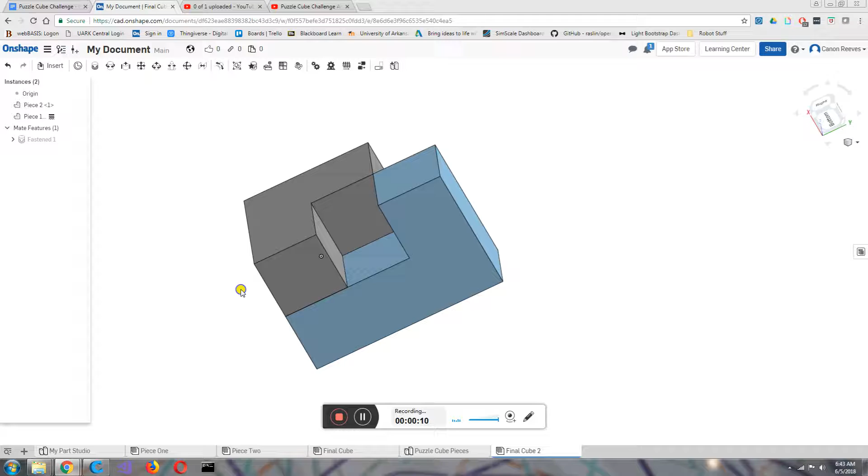Alright, in this video I'm going to walk you through making my own puzzle cube using the second approach. I'll talk through some of it as I do it. I might move a little fast, so feel free to pause and rewind.

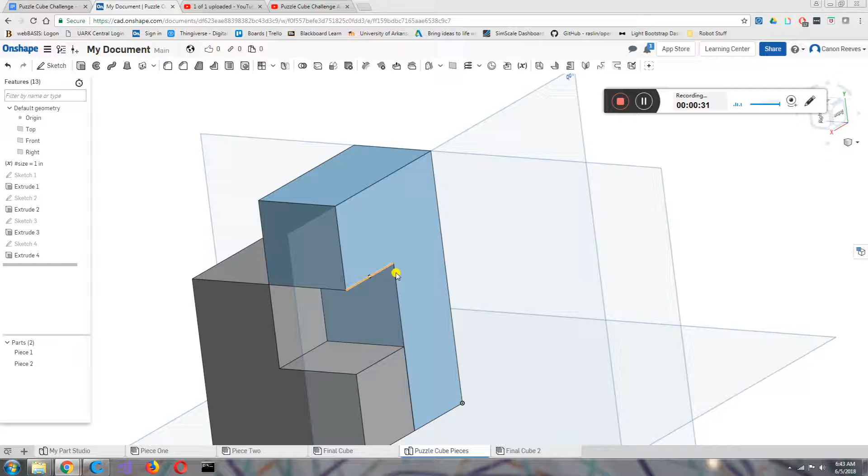To start, I'm going back to my puzzle cube pieces part studio, and I'm going to create more parts. I like to assemble it here inside the part studio as I create it, so I can see where I have room. So far I've just made a 2x2 cube, so I've got a lot of room in some directions. I'm going to start right here.

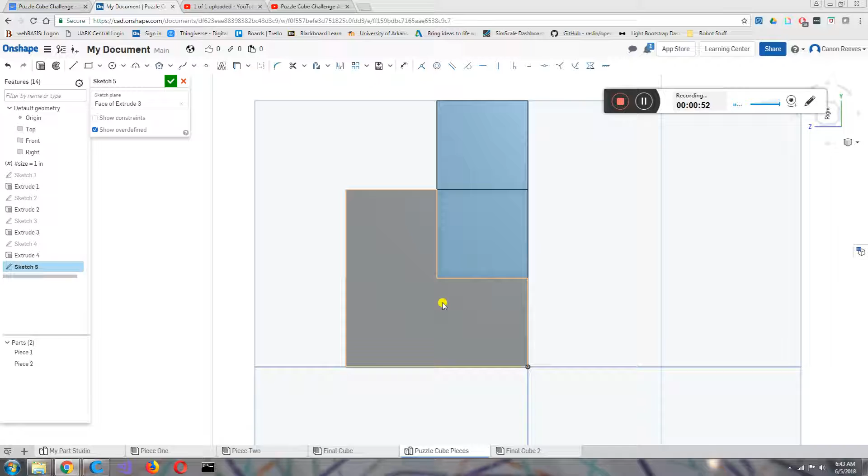It's still blue, so I need to fix that. I'm going to click on dimension, click on this side, and type hashtag size. This one's still pretty long, and I want it to be 3 long.

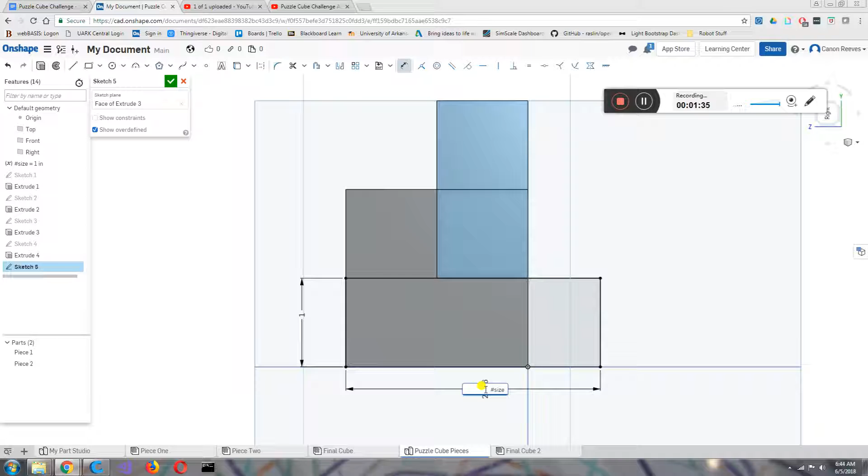I'm going to click on dimension again, then click on this line, and say hashtag size times 3. Now it's 3 long. I think I want it to be a little cooler than that. Actually, no, we'll go with this.

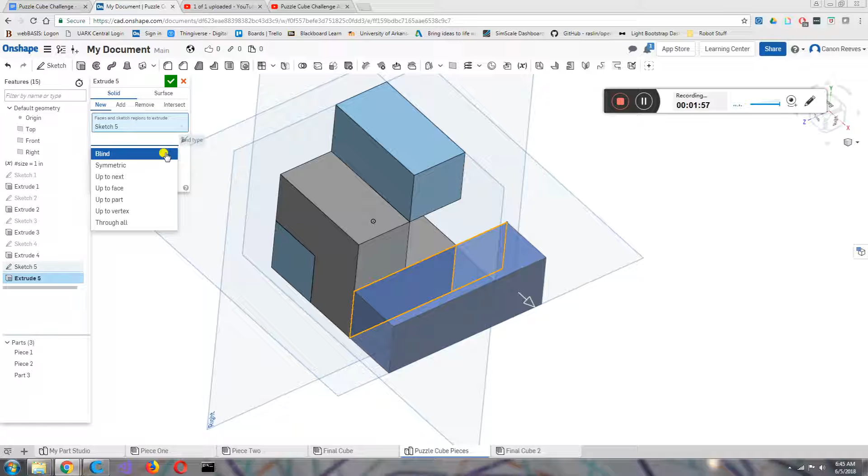I'm going to hit the check mark, go to extrude, hit sketch 5, and say I want it to be a new one. So here we have a new part. I'm going to change this depth to hashtag size, then hit the green arrow. So there's another part, but it's only 3, and I can do something a little fancier.

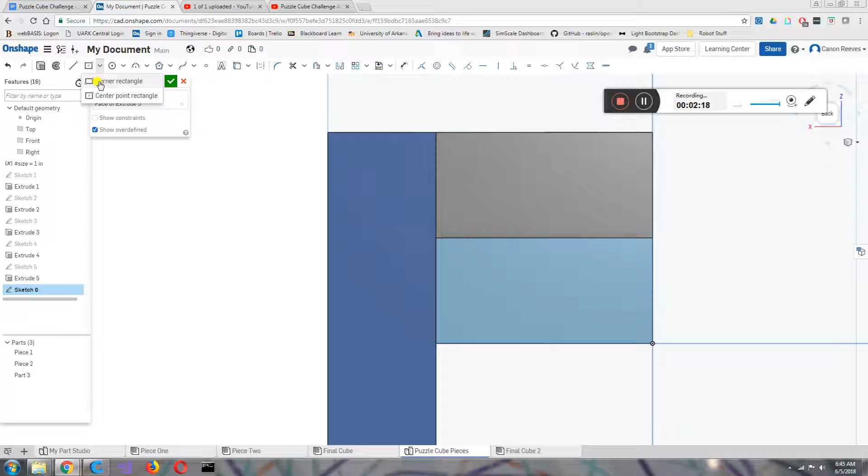So what I'm going to do is create a sketch, go to this top right here, and make a rectangle somewhere. Oh, wrong one - come over here, hit corner rectangle right here and right here.

So what if I want this to be in the middle, like in this middle cube spot, so I can make a cube go up right here and then over into this gap right here? Well, if I just did this line and said hashtag size, it would get the right size, but this whole cube still moves.

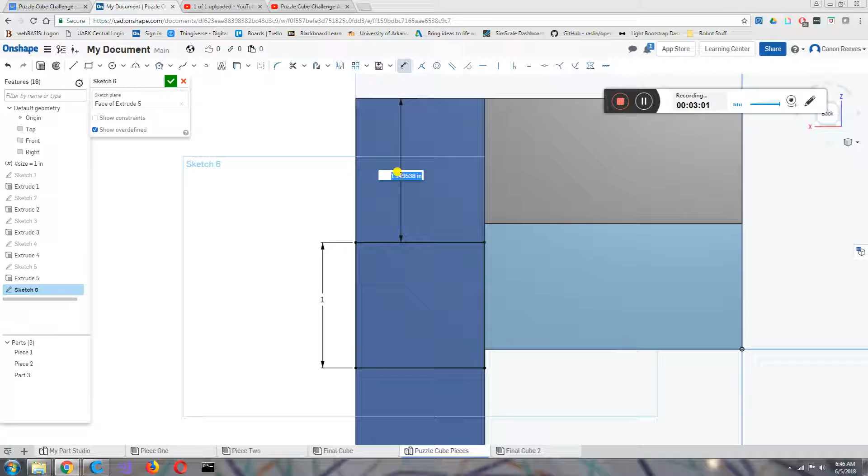So I want it to be in line with this. What I can do is go back to dimension, click on this line and this far line right here, and also want this to be size. So I go hashtag size, and that puts it right there in the middle, if you can see that - that's in the middle where I want it.

I'm going to hit the check mark, go to extrude, and click on sketch 6, and we see our cube. I'm going to type in hashtag size, and we're good to go.

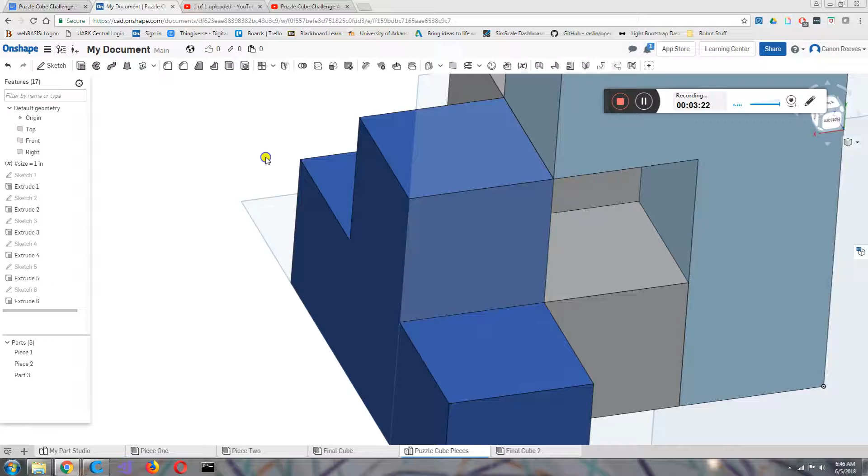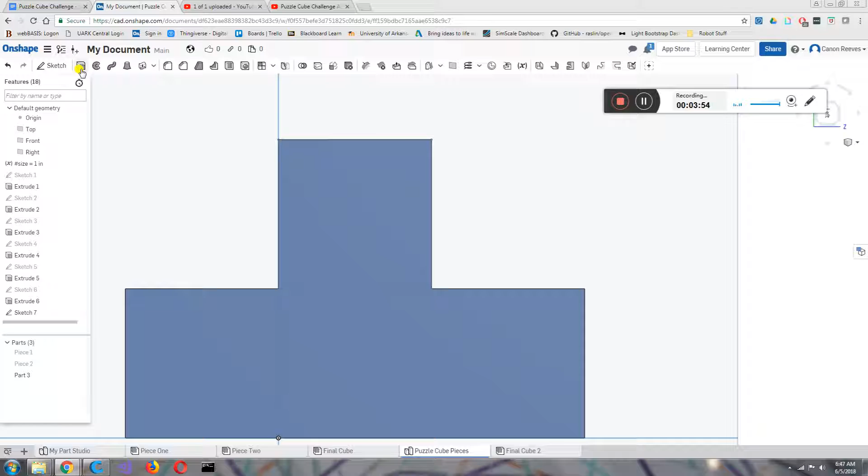So I want a rectangle from this corner, a square, from that corner to that corner. If we look, it's all black because it's just using the corners, so we're good to go. I'm going to hit the check mark, hit extrude, rotate it a little bit, and pick the last sketch. Go to this, type in hashtag size, and we're good to go.

There's another piece. So now I want to see my other pieces. First I'm going to rename this - right click on it, go piece 3 - and I'm going to click on the eyeball.

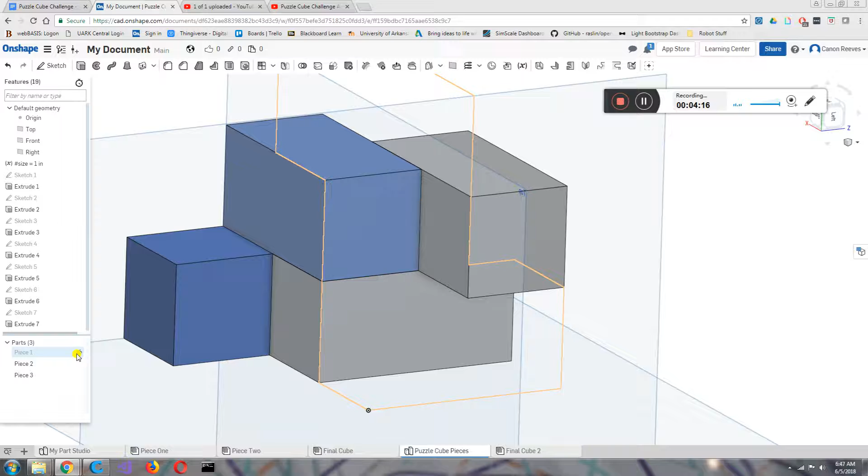So you see how there's a little cross through it? That just means it's invisible right now. Alright, so now they're all visible, and let me check my assembly. Actually, I can keep working on it in here, and I'll check the assembly in a minute.

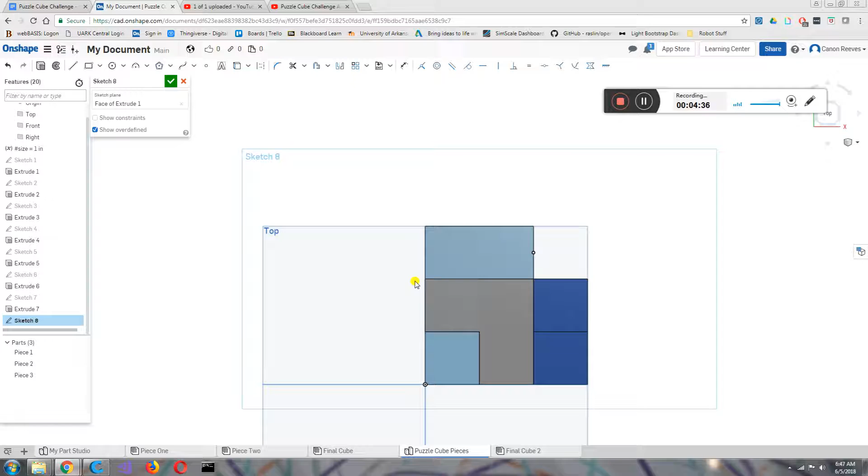So I see an opportunity for a kind of weird piece. What I'll do is click sketch, click on this face right here. Okay, so I'm going to make an L that goes all the way along to this.

Let's see, what would be the best way? Why don't we start by making a line? Go from this corner all the way out here, and then we're going to come down, and it's going to go right here, and it's going to go over all the way up to right here.

Not everything is straight yet, but I can fix that. Come up, click on that. So some of the stuff isn't exactly right, and we want to change that.

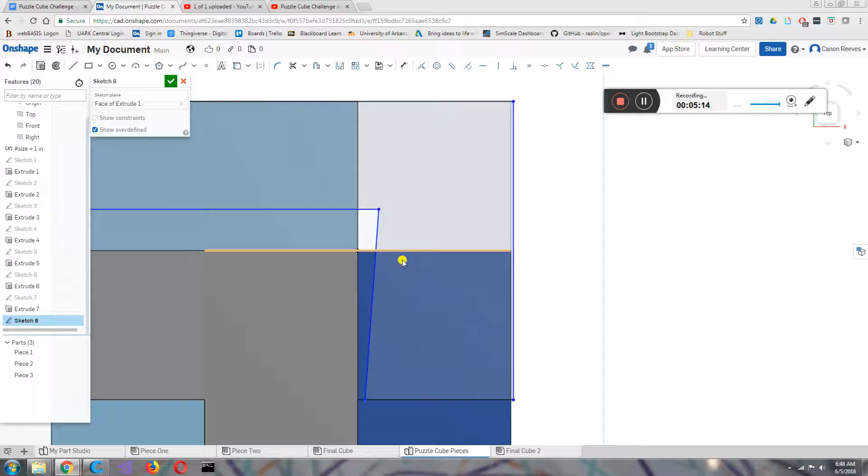So I want this corner to be touching this corner, and I want this corner to be touching this corner. You can just drag these things.

What you can also do is click on it, click on that point, and go over here and click on what's called coincident. And coincident just means that they're touching each other. So now it's black and they're on the same spot.

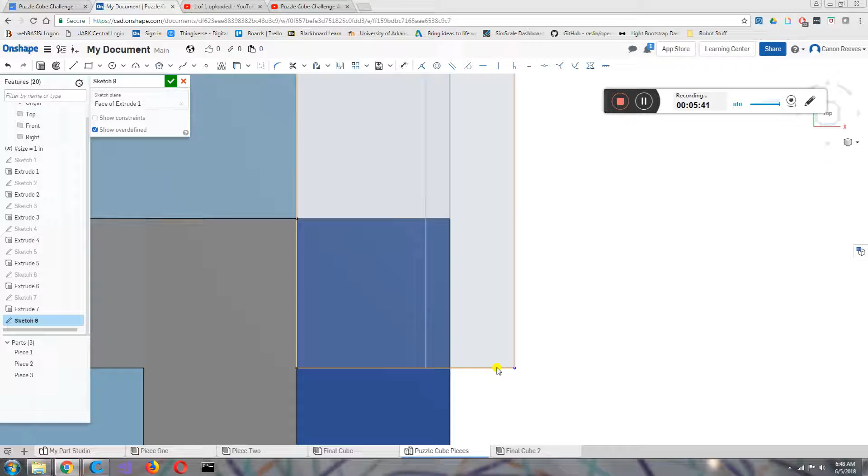We've got the same issue over here. So what I can do is click on this point and this line, and I can say they are coincident. So now the whole thing is all black.

Good to go. Hit the check mark, go to extrude. Asking me where do I want to extrude, I'm going to say sketch 8. So pull out sketch 8, and it's saying new again, and it's a slightly different color.

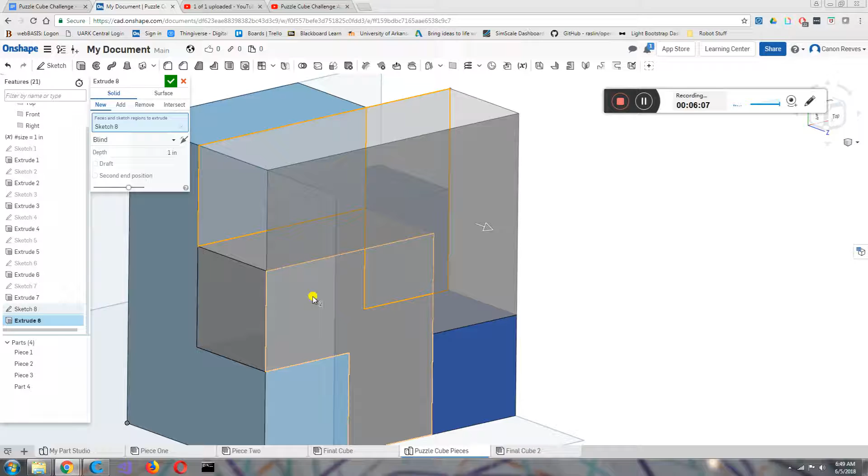For me, it's kind of confusing. They look kind of similar. I'm a little bit colorblind. But I know that they are different because it's saying new. So I'm going to type hashtag size, if I could spell. Hashtag size right there. And we're good to go.

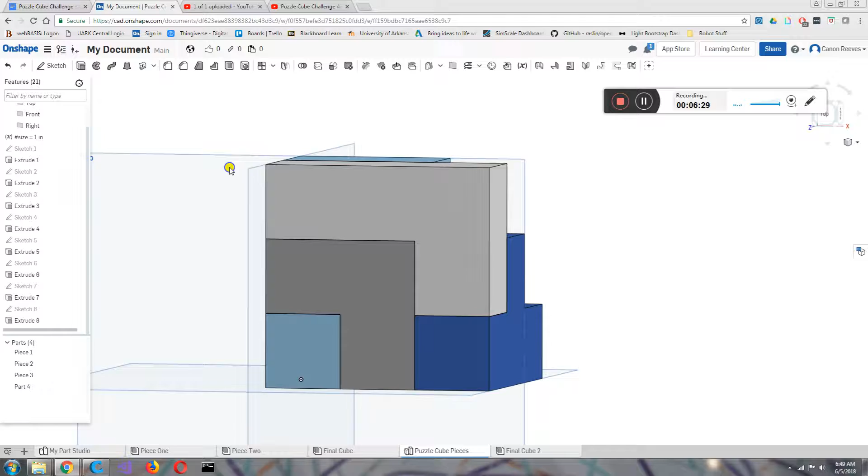So if you look at our cube, we've got 1, 2, 3, 1, 2, 3. But we're missing some stuff over here. So what if this piece had an extra little part to it?

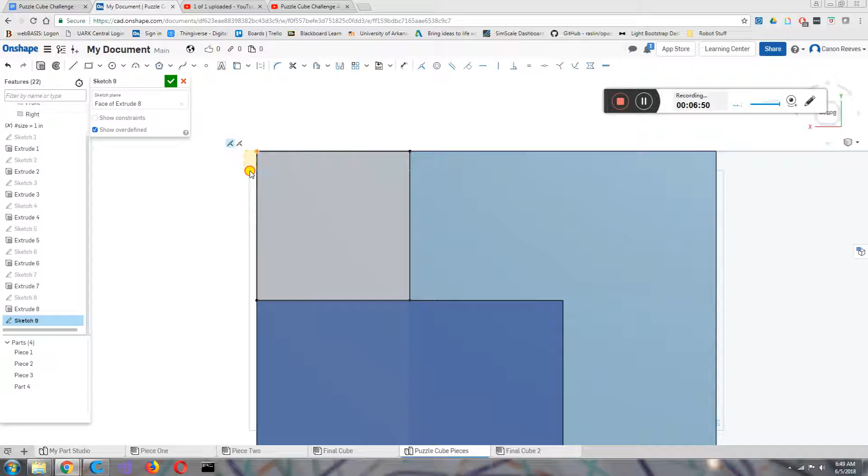So now it's saying new. Remember that problem we talked about in the last video about how it doesn't know if it should be a part of this one or this one? Well, I want it to be adding.

So I click add, now it's red. And I'm going to go click on merge scope right here, left click. And I'm going to click on the part I want, which is this white one. So it becomes a part of it.

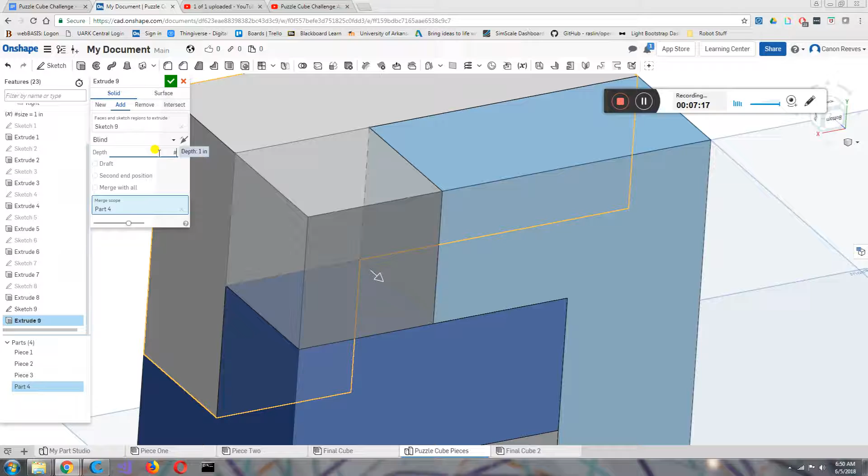I'm going to change depth, the hashtag size, and click check mark. So now we're good to go.

How many pieces do we have? So we've got 1, 2, 3, 4. I'm going to rename that to piece 4.

So it looks like we have room for one more piece. Maybe it's going to be a kind of boring piece. We can change how it looks though. So we'll have to put a sketch on this side.

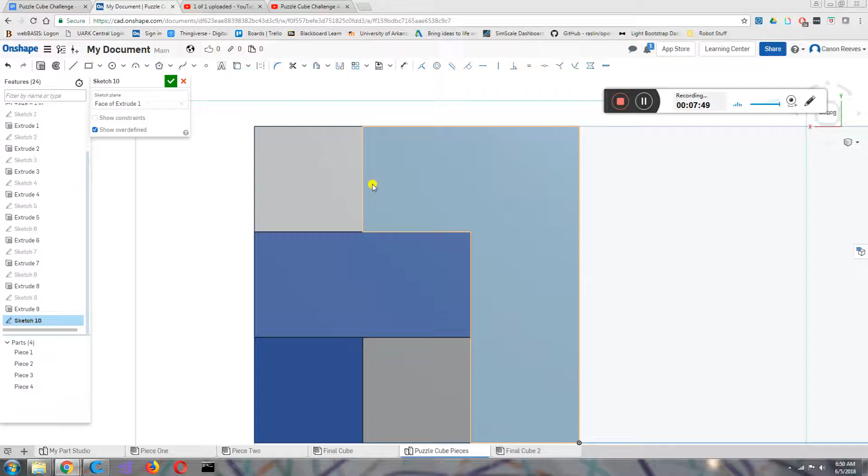And what I think I'm going to do is make it a little bit different. I'm going to make it, let's see. Let's start right here, go all the way up to right here, come over here, and we'll go this way, come down here, and connect back there.

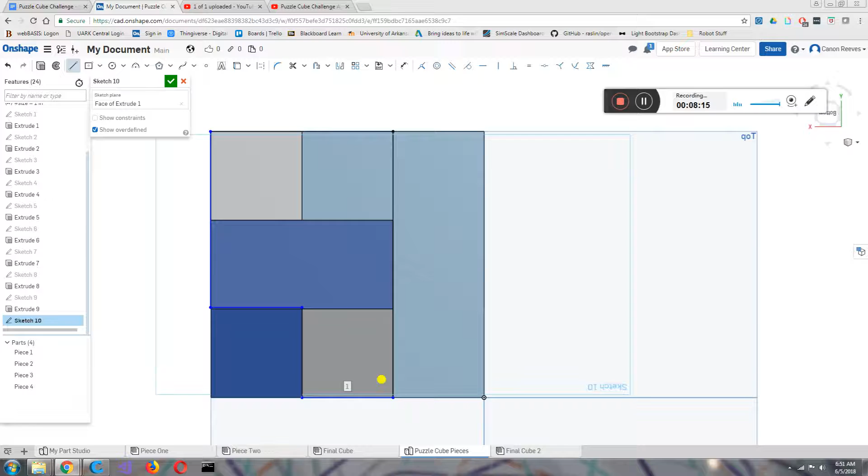So I don't know if you can see all the things that I did there. I'm going to hide all of the other pieces so you get a better idea. That's the shape I just made, and then you see this other bit highlighted. That's just from the face that we're drawing on.

So I want these to be the right size. I want this one to be two wide, so I'm going to go hit dimension, click on it. I'm going to type in hashtag size. Oh, see, that wasn't right because I wanted it to be long. So I'm going to do hashtag size times 2.

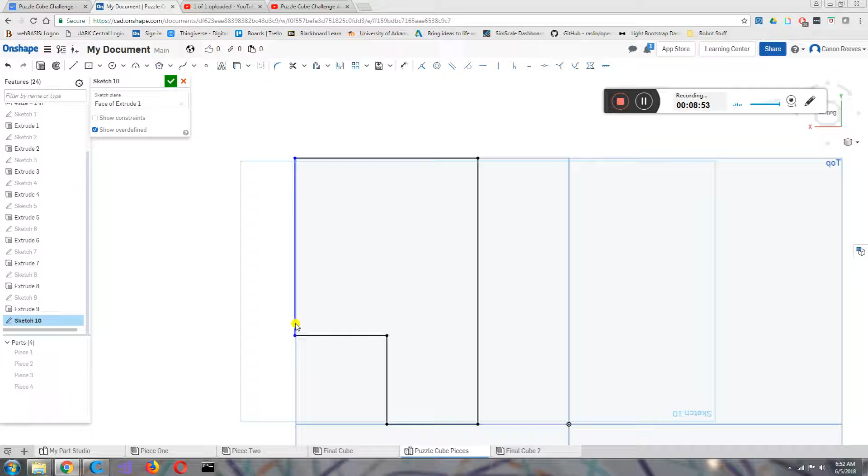Now it's too long, 2 units long, and this side can move, and I only want it to be 1. So I'm going to type in hashtag size. Now the whole thing is black, properly constrained, and I can hit this check mark. I'm going to hit extrude, click on sketch 10, new, go to depth, write hashtag size, and hit the check mark.

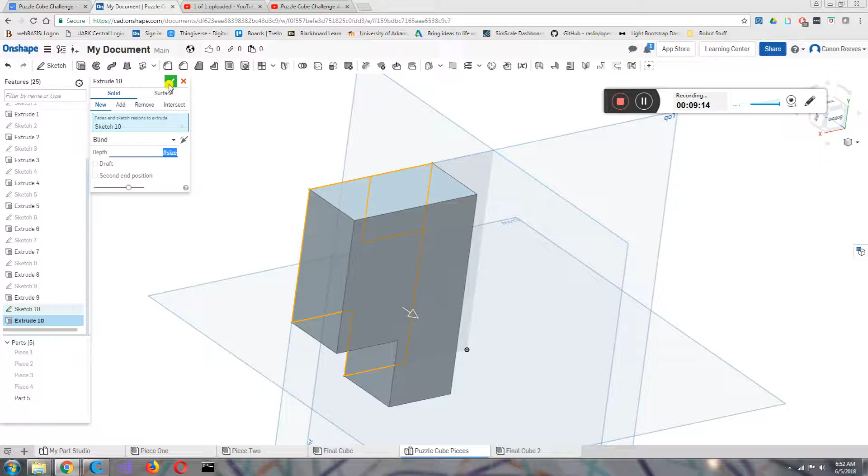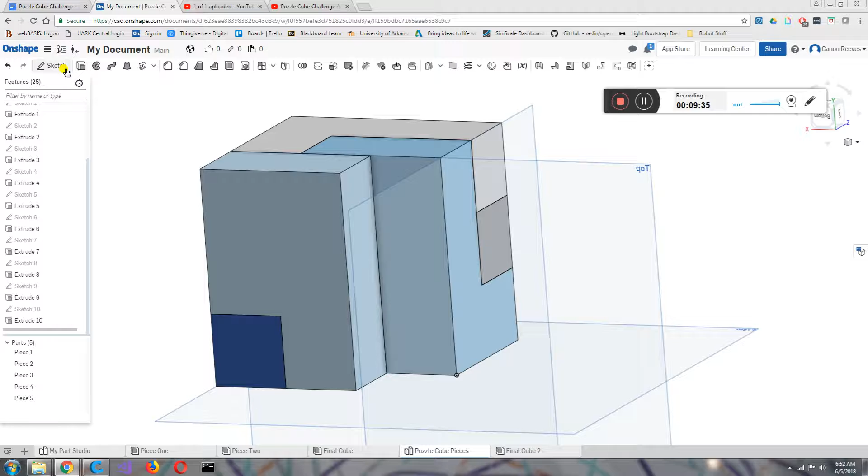So now, if I unhide all my pieces, rename this piece 5. It looks like we've got room right here to add some things, and you can pick how you want to do it. So maybe I want to add 1 to this guy.

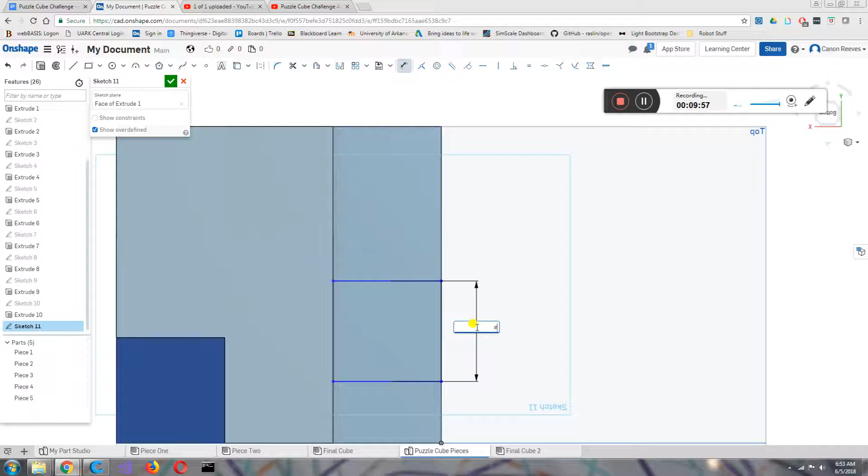I'm going to come over here and hit corner rectangle right there and right there. So it's all up in the air again. I'm going to click on dimension, go to this piece and this line, and make the distance between those hashtag size.

And now we're at the problem again where this is just free forming, and I think I'm going to make it right in the middle. So I'm going to go back, hit dimension, click on this line, and make that hashtag size as well. Now we have one rectangle right in the middle.

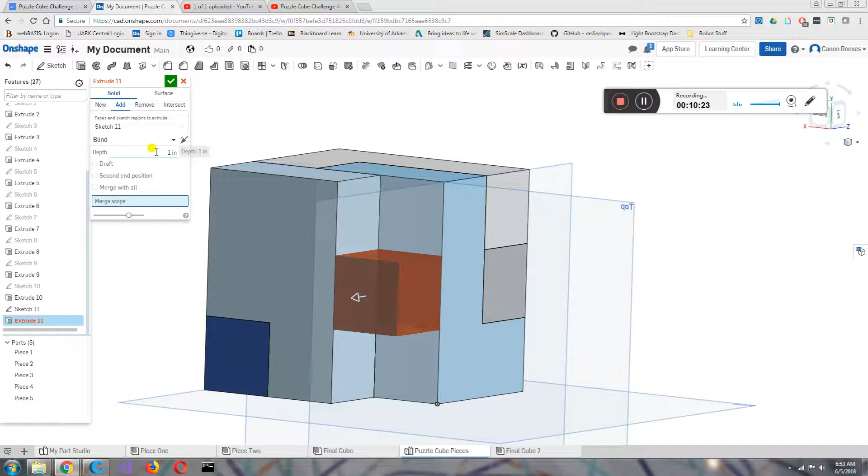I'm going to hit extrude, click on sketch 11, and I want it to add, I think to the blue one right here. Then I'm going to make its depth hashtag size. So there's only 2 more holes to be filled on our cube, and I'll fill it with this one.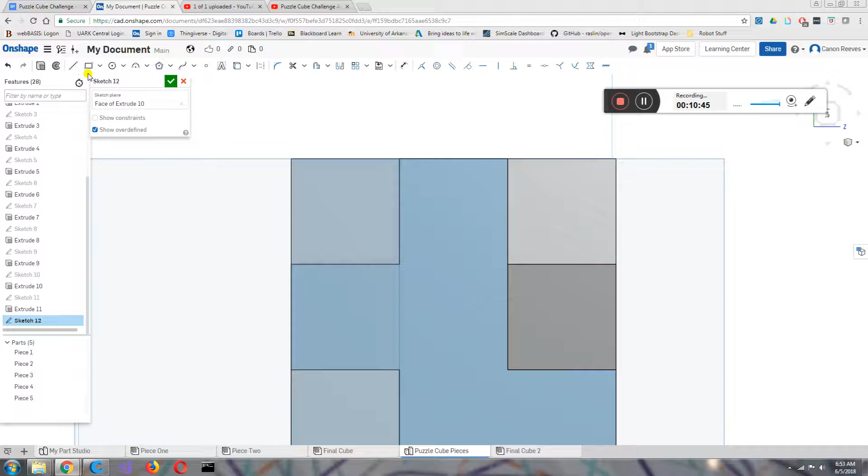So I'm going to come right here and put a sketch on this face, hit N, which stands for normal, and click on rectangle.

Looks like it's still a little bit blue, so you can change that to hashtag size. Now I'm going to show you kind of a cool trick that I really like and use a lot when modeling. If you notice, I can see this little point right here — that's the midpoint between this point and this point, that entire line.

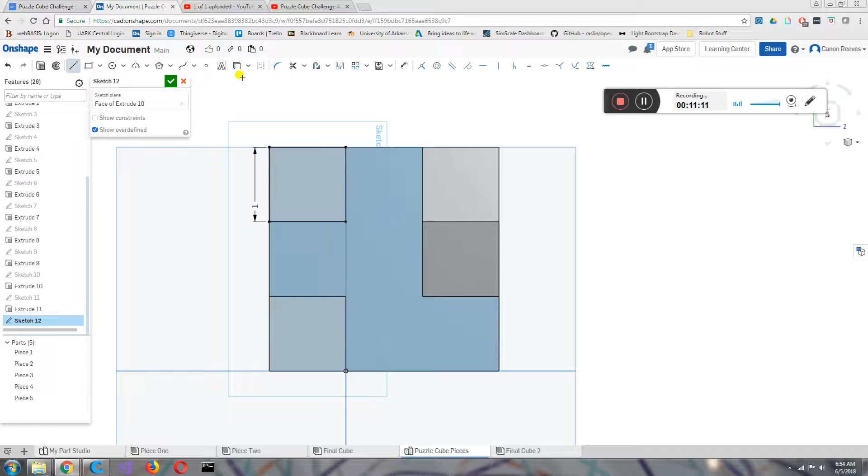What I'm going to do is click on line, and then click on construction, which makes the computer ignore it whenever it's extruding. I'm just going to drag this all the way across. So this line is like the middle of this cube, if I cut it in half.

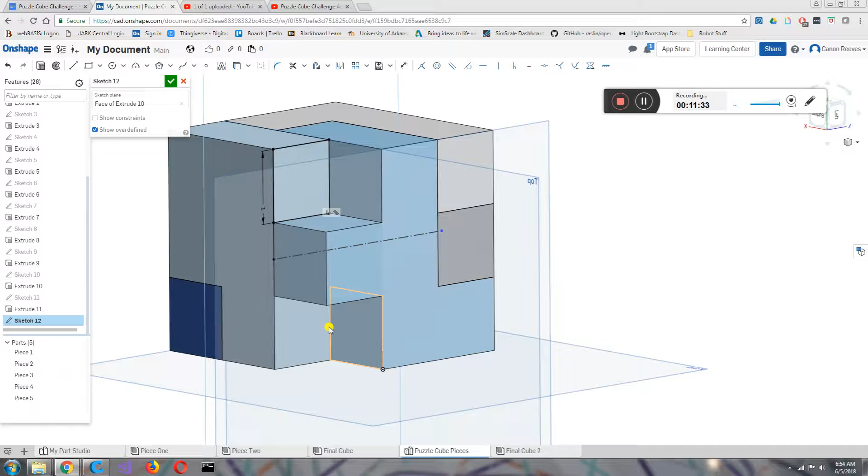And I want another square just like this right here. So wouldn't it be cool if I had a way to just flip it and mirror it? Well, there actually is a way to do that — you just click on this mirror button right here.

We click on our line, and then we highlight everything we want to be mirrored, so it'll be that right there. I don't know if you saw that, but now I have a square right there.

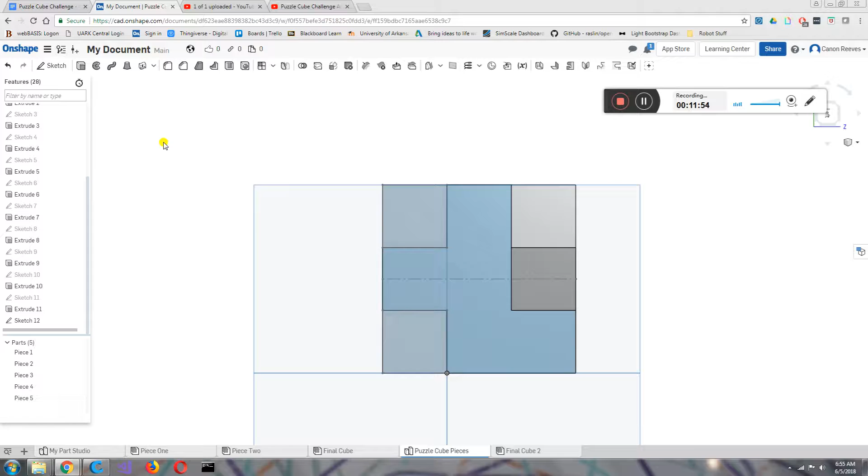So if I go and hit check mark, then go hit extrude, click on sketch 12, it'll extrude, but it looks like it's trying to make new ones. So I'm going to go to add, and tell it that I want it to merge with that piece, and go hashtag size.

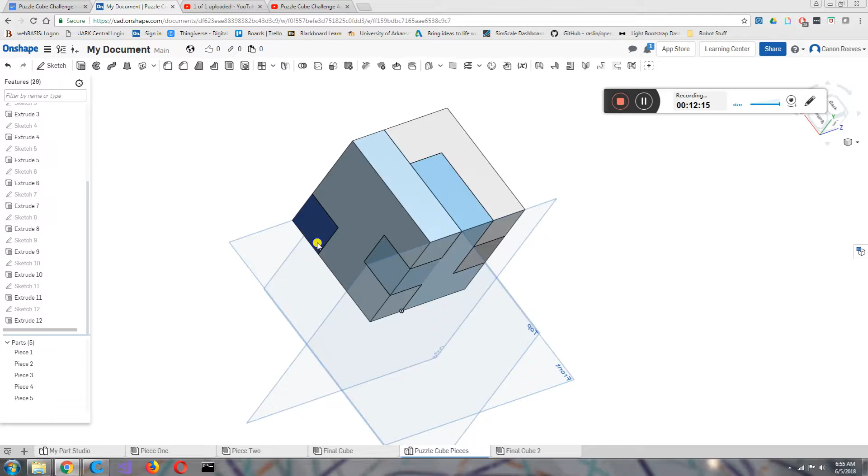So if you look at it, we've got a pretty well finalized puzzle cube. I didn't assemble this yet. The video is getting kind of long, so I'll let you guys figure out assembling, and we'll be there if y'all need help too.

And here are the pieces. Remember, if you wanted to change the color, right click on the piece, go to edit appearance. So I like red, I'm going to make this one red, and I want to make this one really nice blue. Oh, I have them both selected. Make this one red again.

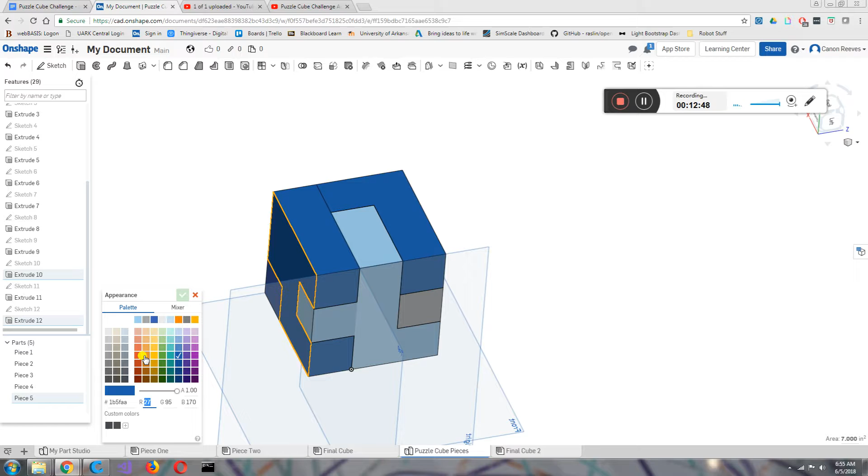There we go. So what you'll notice too is if you click on multiple, you'll see this little number by our cursor. Right now it says 3. If I click on it again, it'll unclick it. And if you click in the white space, it'll deselect all of them. Just a useful little tip.

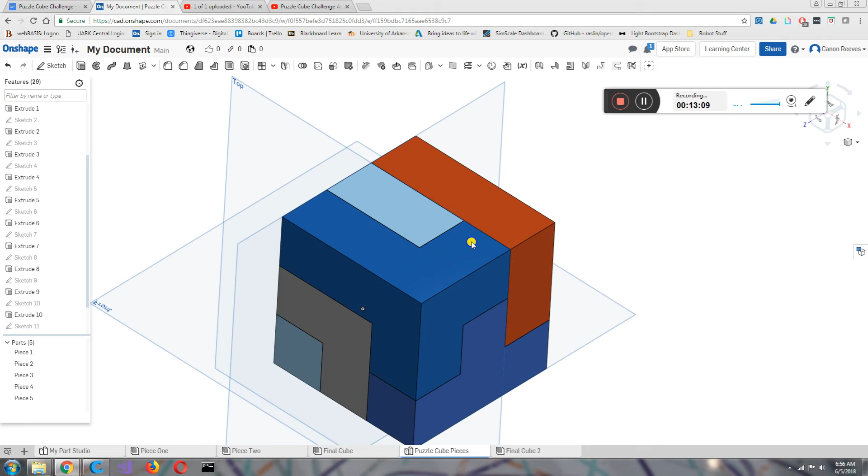Anyways, that is how I would design the puzzle cube. Now be sure to design your own cube, make it different, make it unique. Try to make it a little bit challenging too. Best of luck.